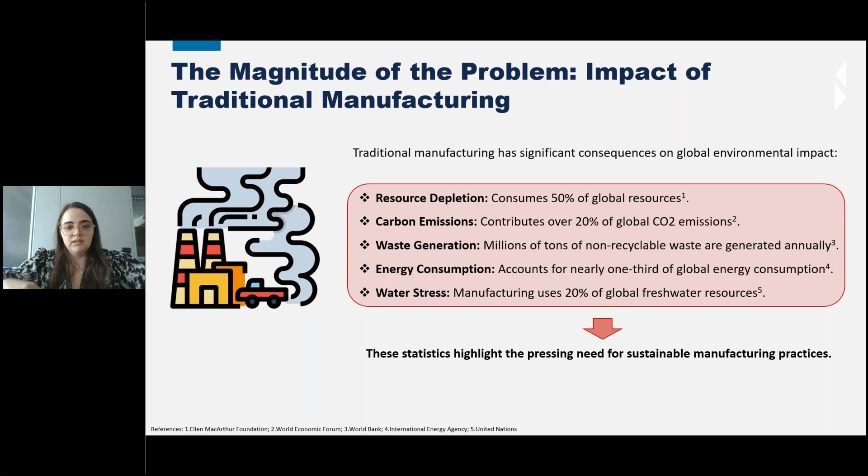The energy consumption related to traditional manufacturing processes is equal to nearly one third of global energy consumption. It's also responsible for more than 20% of global freshwater resource use. Seeing these numbers, you can see why it's so important to take action on this topic.

But what do we mean when we say sustainable manufacturing? When we say sustainable manufacturing, we refer to all the practices needed to design, source, and deliver a product with the maximum amount of value, while keeping the minimum environmental impact.

Sustainable practices should address climate change mitigation by reducing greenhouse gas emissions and energy consumption, but also minimizing material waste and optimizing resource use in processes. It's important to address responsible consumption, giving consumers eco-friendly products, and to be compliant with all the laws and standards related to the environment.

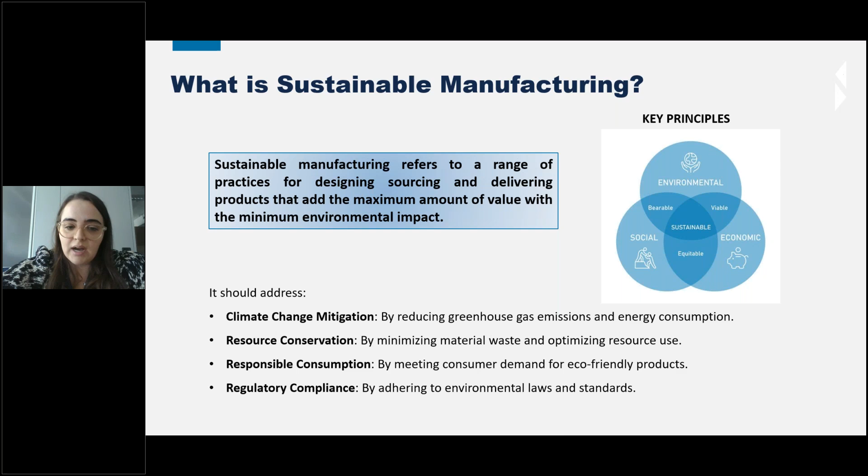But it's very important to focus also on the other aspects of sustainability. In order for a process or product to be sustainable, it needs not only to be sustainable from an environmental point of view, but also economically viable and socially acceptable.

But I think the main topic is how companies can benefit from the use of sustainable practices. The first benefit a company can have is, of course, cost saving, derived from reduced energy consumption, reduced resource use, but also minimization of the waste that needs to be disposed of at the end of the process.

This practice will allow environmental preservation, contributing to a healthier world for everyone, but also being compliant with all environmental regulations, and will give the opportunity to respond to the increasing market demand of eco-conscious consumers who want eco-friendly products.

Using sustainability in your company will also give a positive global reputation, giving a positive image of the company. But we also have to consider that the world is changing, and sustainability is becoming no longer a choice for companies. This will allow success in the future.

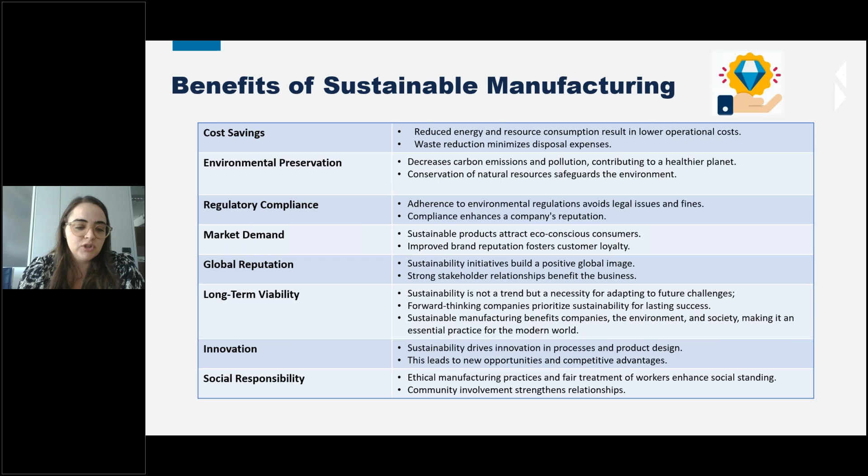So let's now go into the case studies that we want to show you today. We will present different types of projects, case studies that address different sectors in manufacturing.

As you can see, the first three projects are related to the composite sector. The first two mainly in the automotive sector, the third one more in the wind power sector. The fourth project is related also to wind offshore facilities, but more in the development of material solutions. The fifth project is more a horizontal theme that can be applied to different sectors, focusing on human-centered rapid reconfiguration of production and value chain. The last project is related to the heavy and extractive industry waste of this sector.

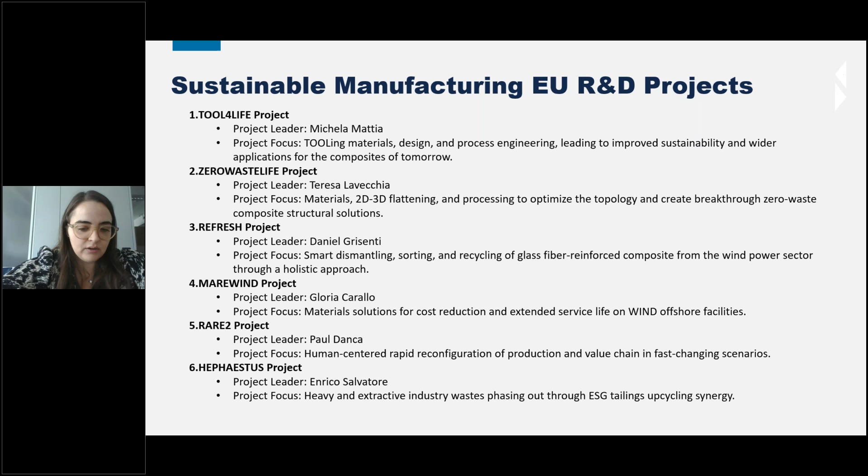So I will present the first project, which is TOOL4LIFE, and then I will give the floor to my colleagues to describe the other projects.

As I told before, TOOL4LIFE is a project related to composites, and it received funds from the European Union under the LIFE program. The title of this project is Tooling Materials, Design and Process Engineering, leading to improved sustainability and wider applications for the composites of tomorrow.

When we talk about composites, we can talk about different sectors and applications. Due to their properties, they can be applied to different end uses, for example automotive, aeronautics, space, nautical sector. This is because they are very light material, but allow very high mechanical performance.

But what is the problem of composites? Especially the sustainability of these products. Usually they cannot be recycled due to the use of thermosetting materials for their production.

What do we want to achieve with TOOL4LIFE? TOOL4LIFE wants to address the issue of sustainability in a pre-processing step, the application of tooling as mold for composite manufacturing. If we consider nowadays, more than 95% of tooling is made with thermosetting materials such as polyurethanes, and it corresponds to more than 2,000 tons per year of material that is landfilled, just in Italy.

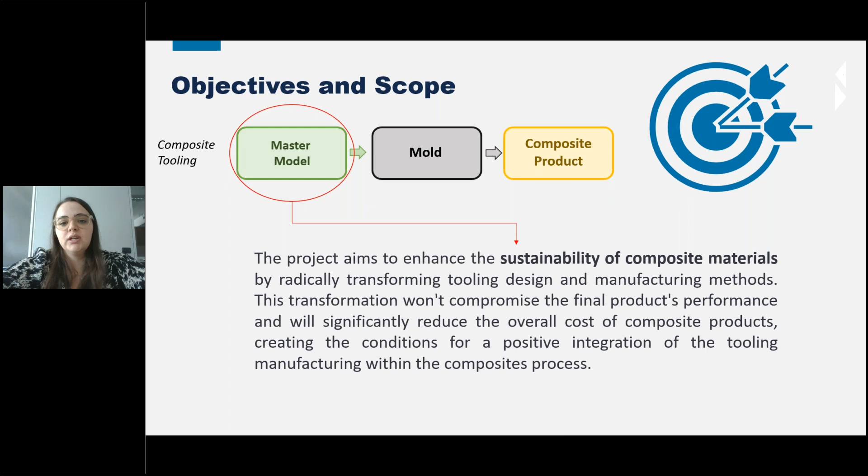When we want to produce a composite product, before having the final product, we need to first produce a master model. This master model will be used to produce a mold that is finally used to produce the final product. With TOOL4LIFE, we want to work on this first step, the production of the master model. We want to transform the tooling design and the manufacturing method of the master model in order to not modify the final performance of the composite product, but reducing the overall cost, reducing the impact of the process, while having a process that is easily incorporated into the traditional production of the composite product.

The objective that we want to achieve with TOOL4LIFE is to develop, adapt, and demonstrate a hybrid technology made of additive manufacturing plus milling for the production of the tooling that will be used for the final product. We foresee to reduce up to 80% the volume of material used in the process, to cut energy consumption by 33%, and to reach a target of 9.2% CO2 equivalent emission reduction compared to the traditional process.

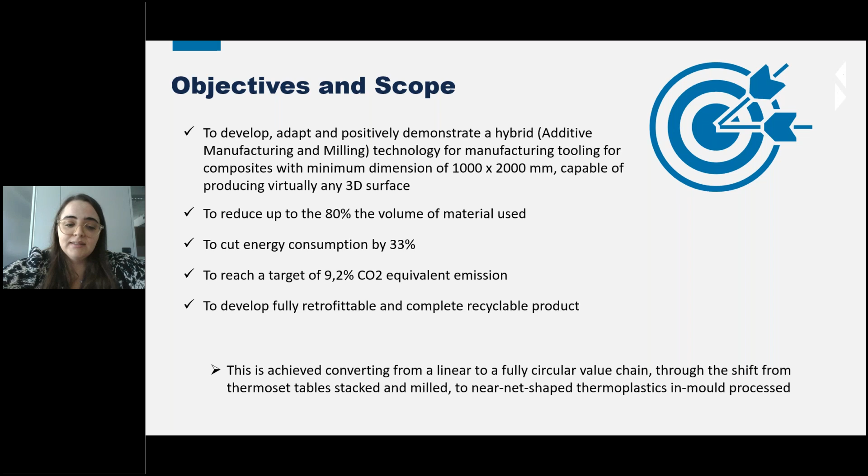We want to develop a new process that is fully retrofittable, and the final product, the tooling that we will have, will be completely recyclable for producing a new process, a new product, new tooling. This will be done by going from a thermosetting material to mainly a thermoplastic material. Which are the impacts that we want to achieve with TOOL4LIFE? I want to give you some numbers of what we are expecting to achieve.

When we talk about waste production, we foresee reducing it by more than 30 tons per year by the end of the project. Considering our replication strategy, what we want to achieve in the medium term, more or less 5 years after the end of the project, is a reduction of waste production around 200 tons per year.

We will also reach energy savings thanks to the use of additive manufacturing compared to machining of the tooling, which is the process used now. This will be equal to 18 megawatt-hours per year at the end of the project, and hopefully 120 megawatt-hours per year in the medium term.

This new process will also allow the elimination of toxic chemicals now used in the production of thermosetting materials. An example is the use of isocyanates in the production of polyurethane, the most used material now. This elimination will be around 20 tons per year at the end of the project, and in the medium to long term it will reach 130 tons per year.

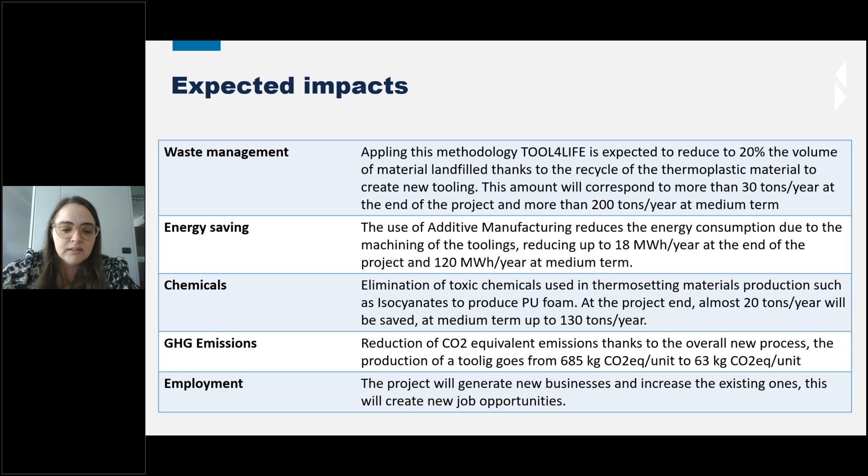TOOL4LIFE will also allow us to reduce CO2 equivalent emissions, reaching an emission of CO2 equivalent per unit of tooling equal to 63 kilograms. It will, of course, also allow us to generate new business and increase job opportunities in the sector.

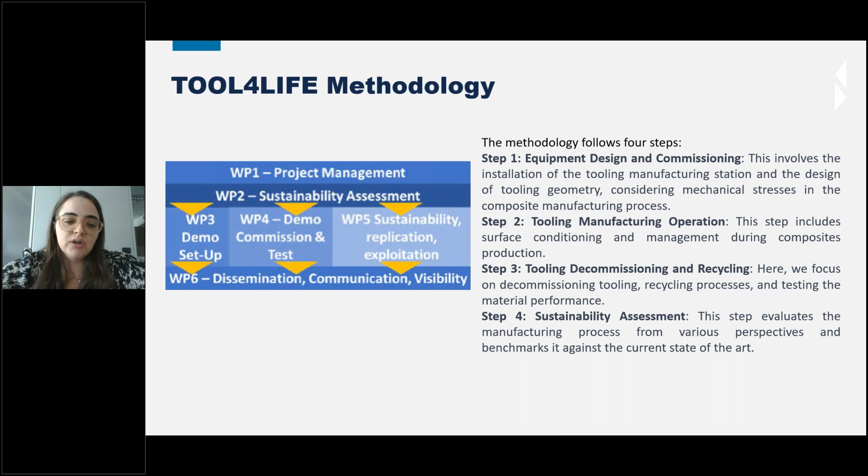At the end of life, the tooling will be recycled, and we will also test production of new tooling using that material. The fourth step will be the sustainability assessment. The results and the process we reach will be almost ready at a commercial TRL.

When we talk about the replication strategy after the end of the project, we are planning to use this process to completely substitute the production in Bercella, but also to achieve production of tooling as a service for other companies using this process. In the long term, we would like to spread this new, more sustainable technology to make other producers similar to Bercella use it, licensing the technology of course.

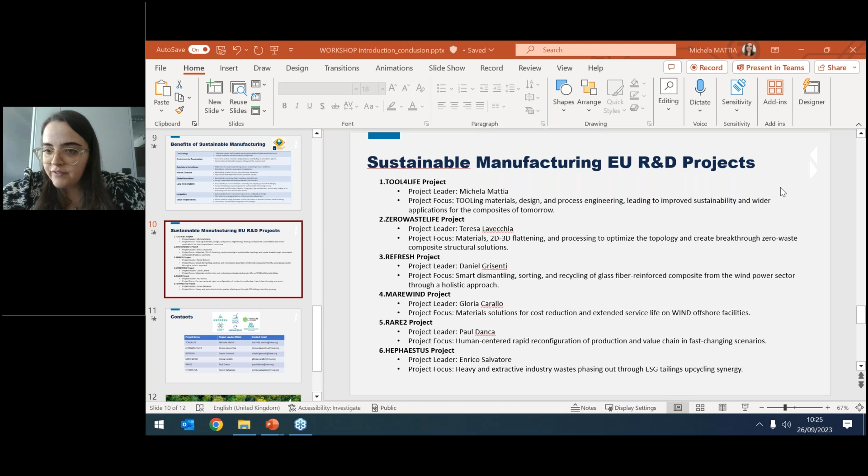I will proceed with a project that is quite the prosecution of Michela's project, and in fact the coordinator of the project is the same, the Bercella company. The project Zero Waste Life has been funded under the Life Program 2022, and started on July 1st, 2023. The objective of the project, differently from Michela's case where tools for preparing pieces were made, is preparing the pieces through an optimized process that improves the global sustainability of composite production.

Going into the depth of the project, as Michela said before, we know the main issues on composite materials, which essentially rely on the difficulty to recycle composite. Generally they are treated by pyrolysis, so incinerated, creating CO2 and chemical emissions, or they are wasted, landfilled, and treated by chemical routes.

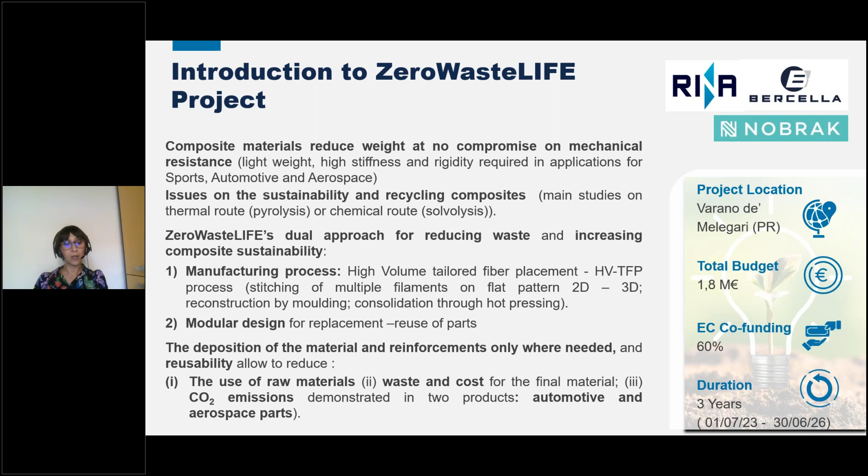To give a more in-depth view of the project, as Michela showed before, the first step in this case will be the consolidation of the design shapes, essentially to optimize with theoretical calculation the shape of the pieces to produce, with the idea to bring waste ideally to zero. Then a design of the basic elements will follow, essentially made of beams, plates and shells that can be combined to create future complex products.

A further step will be the demonstration of this product in a real case study, particularly producing pieces for automotive and aerospace applications. Finally, at the end of the project, there is an exploitation and IPR strategy management, to create awareness around the initiative and increase industrial attractiveness towards this new patented technology brought by Nobrak's partner.

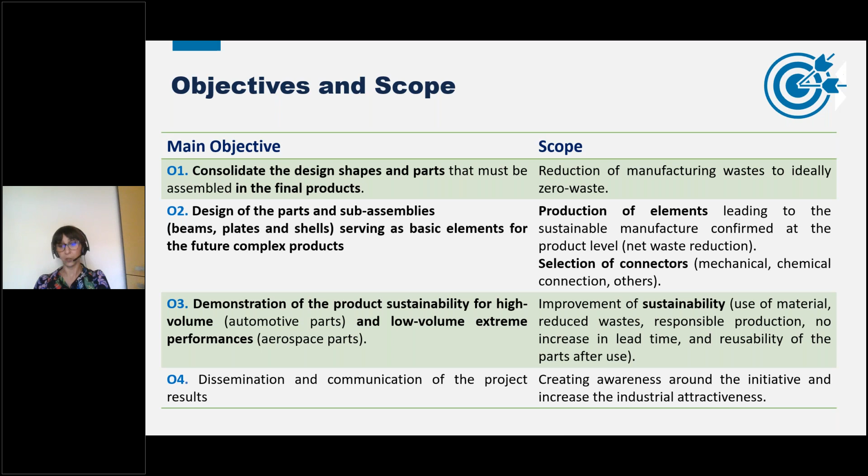In terms of expected impact, as you probably know, the LIFE program addresses several environmental topics, and Zero Waste Life belongs to the circular economy and quality of life sub-program. This program aims at facilitating the transition towards a circular economy, a sustainable economy, and a toxic-free environment.

The Zero Waste Life process addresses several objectives in relation to the sub-program, because what is expected from the project is the reduction of landfill material, since the process requires thermoplastic materials instead of thermosetting material, as Michela said before. That also means reducing non-renewable materials, because thermosetting resins are not recyclable at all, while thermoplastic materials can be reused again and again.

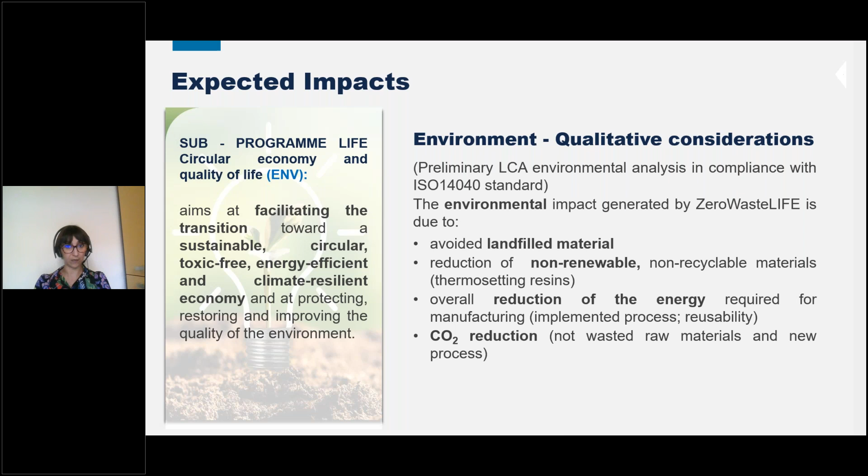We also attempt to give a raw estimation of the quantitative impact of the project, and this estimation, also relying on the numbers of the previous TOOL4LIFE project, has been fixed around the values you can see in these slides.

We expect to save more or less 40% of raw material from landfilling, which is more or less 10 tons per year for Bercella's company, because this is the amount that the company brings to landfilling every year.

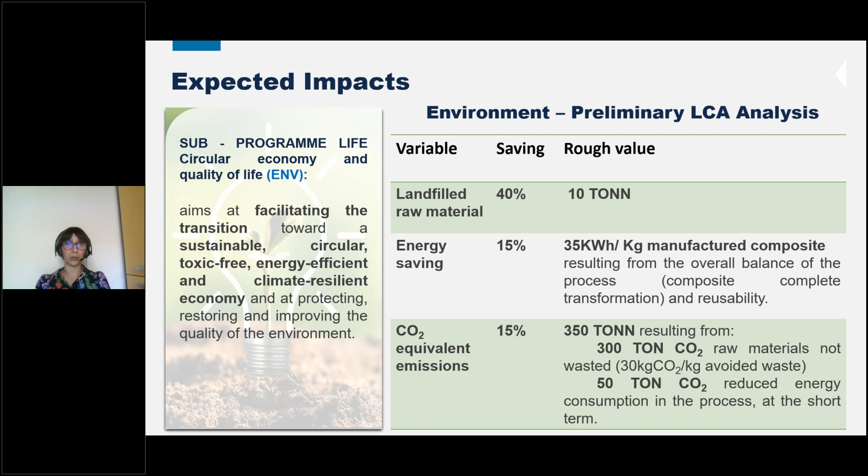We expect an energy saving of 15% that results from the overall balance of the process, and from the possibility of reusing some parts due to the modularity of the pieces. We also expect a reduction of CO2 equivalent emissions of 15%, again due to avoided waste of raw materials, and to the global balance of the process.

We made also some qualitative and economic considerations. As you can understand, avoiding landfilling materials brings with it two types of cost reductions: first, a reduction of the cost of material, and second, a reduction related to the additional taxes generally associated with landfilling material.

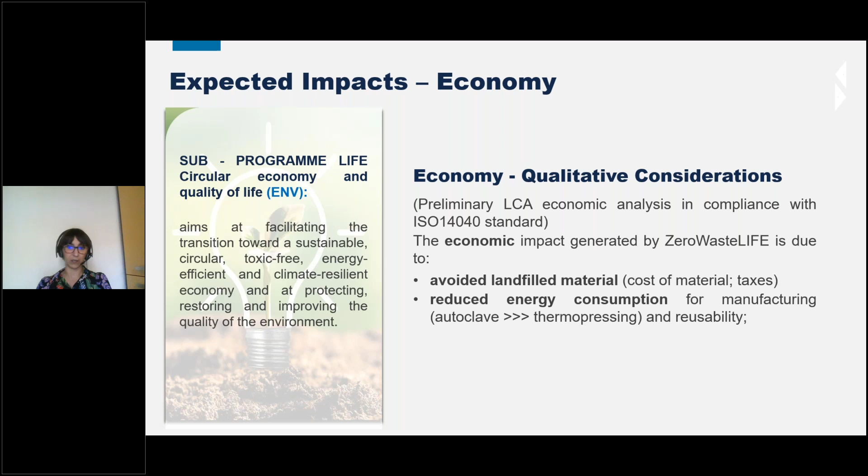Other cost reductions will be due essentially to reduced energy consumption during manufacturing and the reusability of the pieces. We attempted to make a quantitative estimation of the savings in terms of reduced materials and energy, meaning an estimation of production cost. The preliminary LCA analysis shows us that this value can vary from 10 to 40%.

This is a huge interval, essentially due to the type of composite produced during the manufacturing process. Anyhow, we expect as a minimum to reduce the total production cost by 10%.

300,000 euros are the cost savings expected from the raw material that is not discarded at the beginning of the process, and 5,000 euros is expected as a saving in terms of taxes that would otherwise be spent on disposal of the raw material.

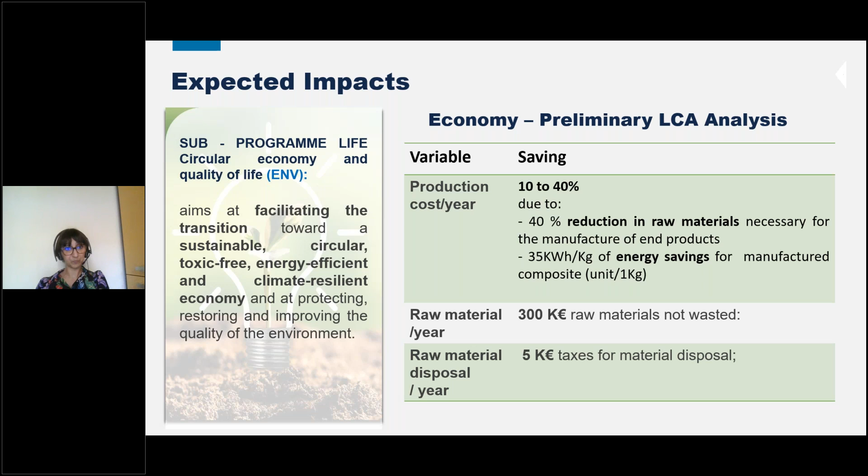We also made some provisions about the impact on society of the project. Obviously, in the short term, what we expect is an improvement of worker conditions in the facilities that implement the process, that is Bercella, and also other clients where the process will eventually be implemented, plus an improvement in the quality of life for citizens thanks to reduced CO2 emissions and reduced landfill and waste materials.

In the long term, the provision is the possibility to increase workplaces and opportunities for training, due essentially to the adoption of a new technology: stitching the filaments in the place where they are essentially required.

Also, Zero Waste Life, like the previous project, is compliant with some objectives of the European Green Deal, particularly the concept of mobilizing industry for a clean and circular economy, obtained by reducing energy consumption and CO2 emissions, and also by reducing waste and recycling produced material once it is dismantled.

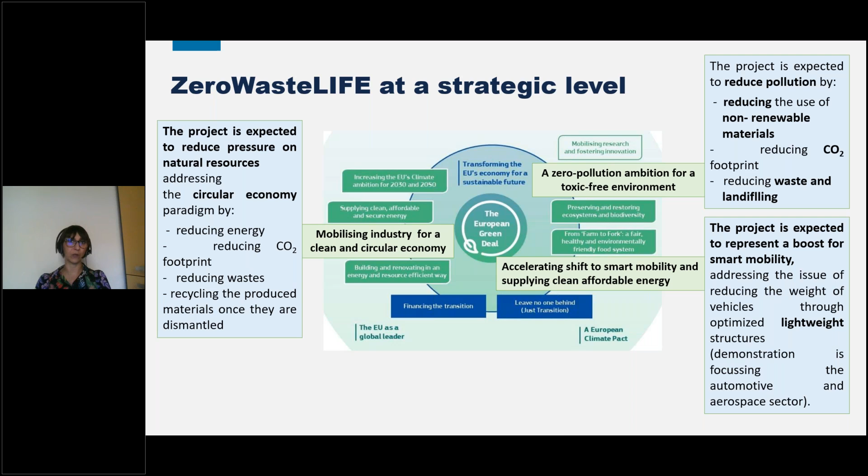Essentially, the idea is that reducing the weight of materials and producing composite materials known for their lightweight and stiffness, with no compromise on mechanical properties, will allow the automotive sector and also, for example, the aerospace sector to produce lightweight structures. This goes towards sustainable mobility, eventually reducing the cost of moving the cars, and as a consequence the produced CO2 and so on.

As with the previous project, this project is organized in 3 main steps: the definition of theoretical parameters and optimization of the design of the pieces and the process; the development of the technologies through demonstration in two real case studies; and finally an economic, environmental, and societal assessment to validate the sustainability of the project.

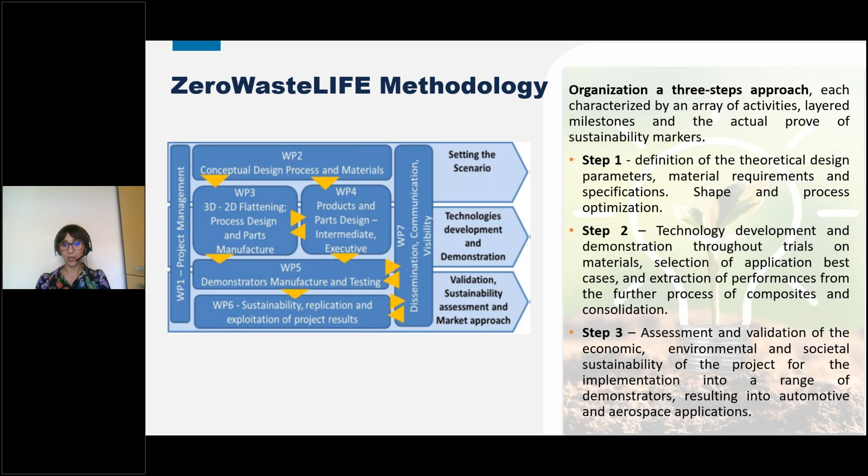in the case of automotive and aerospace application.

So what we expect after the end of the project: our idea is that we can design 3 different levels of exploitation.

The first level is the internal exploitation of the new process by the company, by Bercella. That means reducing the cost of production and creating savings for the company itself. Eventually, the idea with the dissemination and communication plan will be to reach out in the first years of the project to new clients to produce limited series of the new composite.

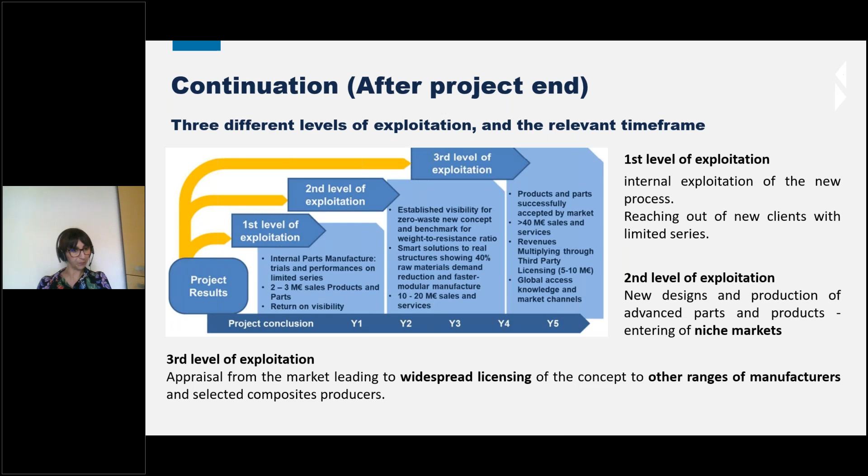Okay, that's all, and I want to thank you for your attention.

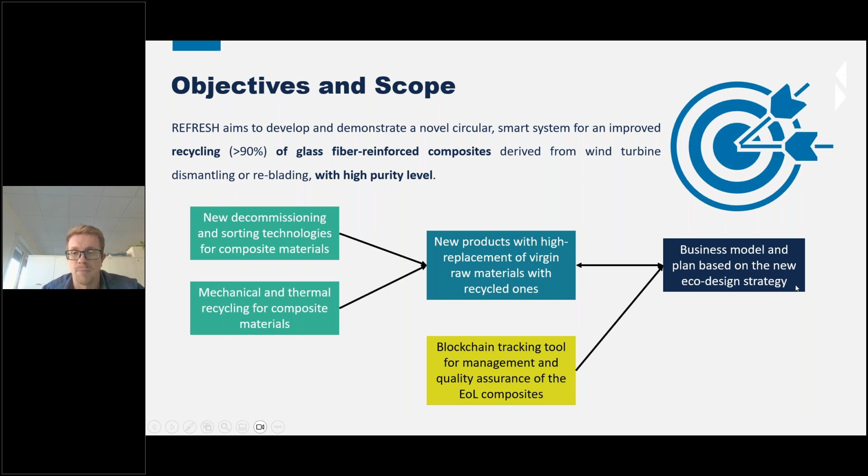Alongside this, there will be the development of a blockchain tracking tool, which aims to manage the data of the recycled components and assure the quality for the end-of-life composites. These objectives will also lead to the development of a business plan for the eco-design of the whole project solution.

This is the concept through which we aim to reach the above objectives. So the whole Refresh concept is to start from the decommissioning of the wind blades and end with the end product ready for the market.

So at the decommissioning of wind blades, the blockchain tool intervenes, getting the information, technical information, composition information of the dismissed blade. Then the tool makes a market check to check the current market demand of end products.

Once it made the market check, the technical check, environmental check, it selects the proper recycling process that is more suitable at the moment for that blade, for that specific blade. So this is the business, which is flexible because it can constantly adapt to the current market of the sector. After the selection, based on the market demand and technical condition of the blade, there are the different recycling processes.

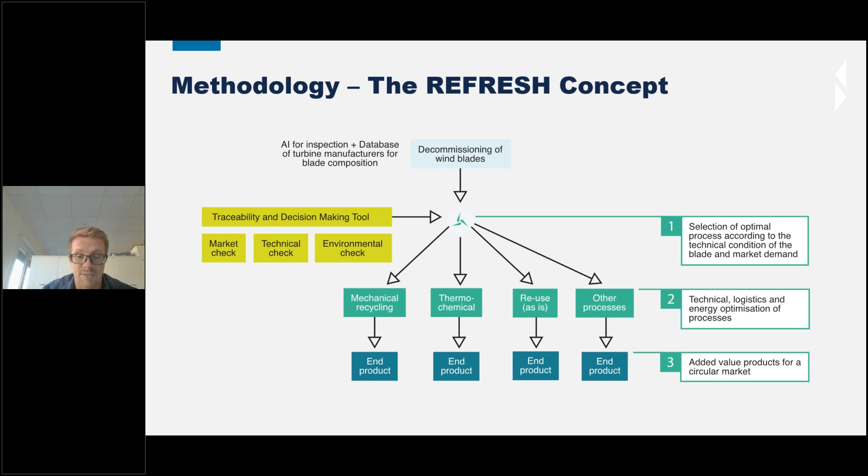And at the end we have a refined end product ready for the market, because this was the real challenge for the project concept. The material that composes wind blades is not so precious, we can say. The fact is that virgin raw material is cheaper because it doesn't need any process to be recovered, so no energy waste, and it usually has greater mechanical properties. So the need was to get an end product with an added value, because that added value makes the solution competitive. So this is the concept: through the various recycling processes, we get an end product with higher replacement of virgin raw material, but we gain in the added value of the project for the circular market.

So, the expected impacts - here there is some data based on the penetration rate expected from the project end. As said before, the main impact is the reduced use of virgin raw materials in terms of composite materials. So we have a lot of tons of product that could be replaced with our recycled materials. These data are based on a forecast assuming, in the first 5 years from the project end, a penetration rate of the project in the market of 5%, and 12% by the next 8 years from the project end.

Then we have an increased amount of recycled composite materials from the wind power sector, which for glass fiber reinforced composite materials amounts to 22 megatons in 5 years from project end, and 53 megatons in 8 years from project end. And lastly, but not least, this will result also in new job opportunities in the waste management sector, the eco-design sector, also the digital sector, because we have the digital part related to the blockchain tracking tool, and the manufacturing sector.

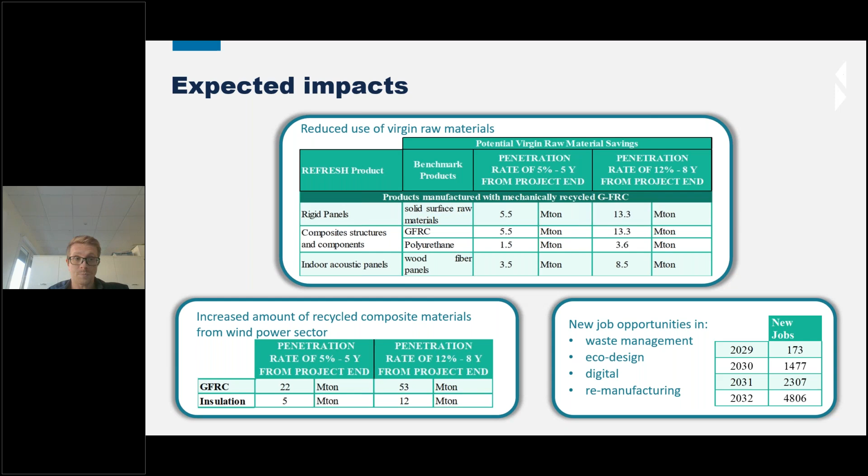So, lastly, the exploitation perspective after the project end. We have different solutions developed by different partners. As I said before, we start from the decommissioning, so we aim to develop a portable system for the dismantling and shredding of wind blades, because wind blades are logistically difficult to transport after dismission. So we plan to have a portable system that can pre-treat the blades and make them more transportable for the recycling processes.

Then we have the mechanical recycling, with a technology and formulation for secondary raw materials recycling. For the thermal processes, as said before, we generally have pyrolysis systems, but one is assisted by microwave, and the other one with electrical pyrolysis. In this case, we can also obtain chemicals from the resin part of the composite material of the wind blade.

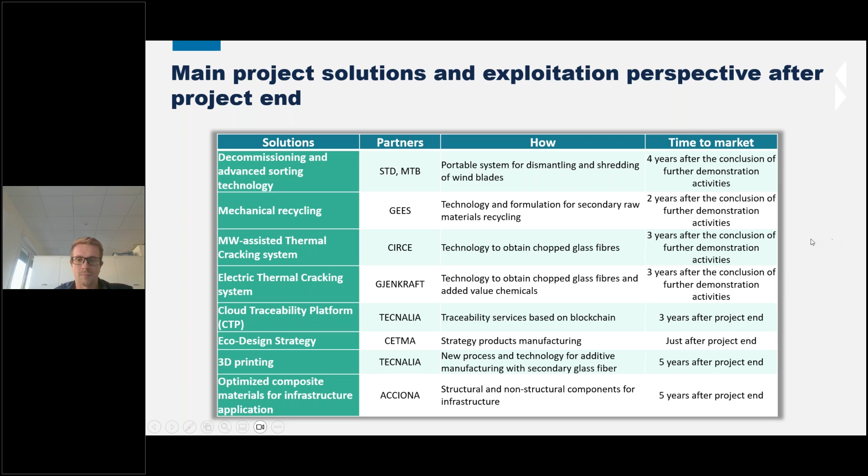So thank you for the attention. Sorry for my voice.

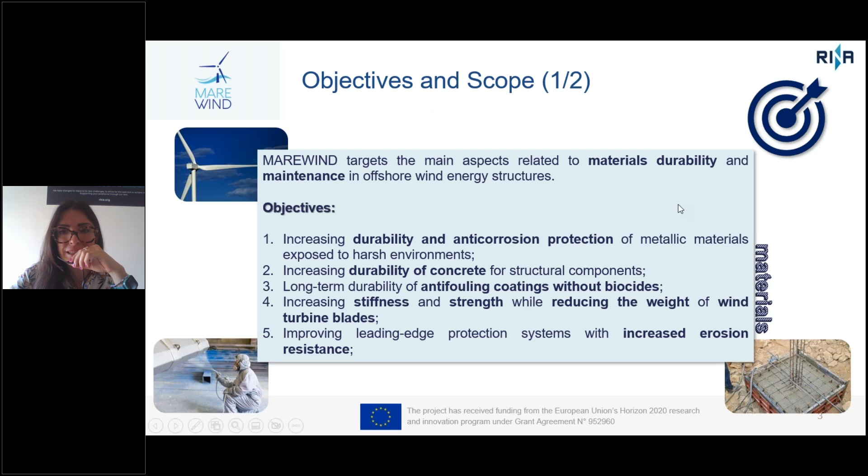In addition to materials, we also have processes that are improved during the project, for instance the development of structural health monitoring techniques for offshore wind turbines. Then some predictive models have been developed during the project for the corrosion protection.

Recyclable by design is one of the approaches developed during the project for the wind turbine, as well as a recycling procedure. Then all the technologies developed during the project should be scalable at the end, and also an application of existing standards for this kind of new materials has been targeted during the project.

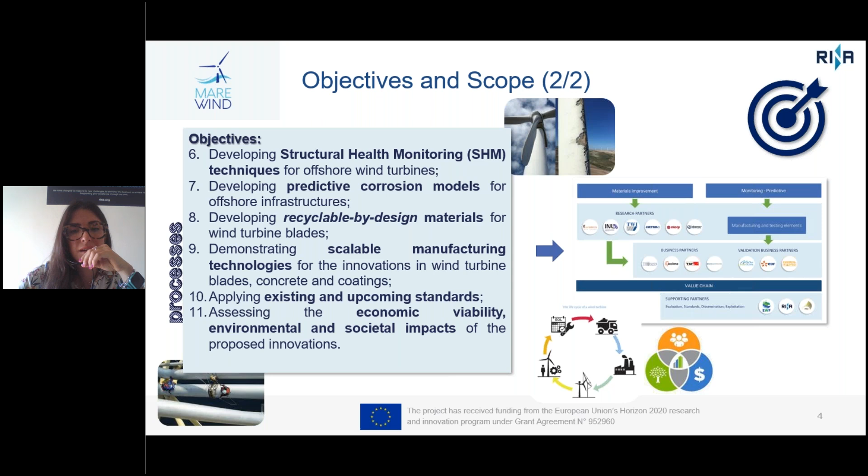Finally, but not the least, the economical, environmental and societal viability of all these proposed solutions is assessed along the project duration. Then, among the expected impacts of MareWind project, we will have, of course, the increase of the durability of new materials developed during MareWind.

So both composite materials for the wind turbine, as well as the anti-corrosion coating, the structural reinforced concrete, anti-fouling coatings, and anti-erosion coating target an increase in their durability with respect to the standard baseline that is available at this moment.

Not only from the material perspective, but also from the cost point of view. And then in order to reduce also the maintenance of this structure along the years, another expected impact is to reduce the life cycle cost of the structure during its lifetime.

Then also the cost reduction of offshore energy production, so this is an indirect effect but also accounted for in the project, and the reduction of environmental impact. At the same time, also reducing CO2 emissions and fuel dependency is one of the expected impacts.

Another indirect but important spin-off of the project is also to create growth and jobs in Europe regarding the marine and wind energy environment.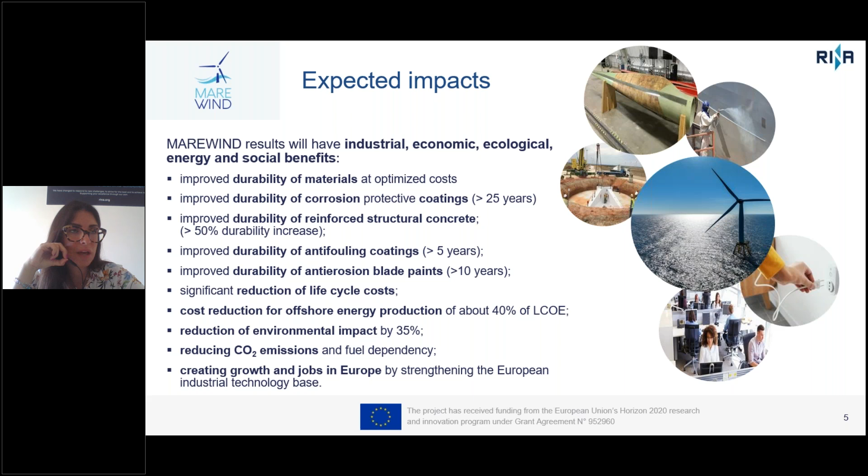At the strategic level, MareWind takes cue from European wind energy sector trends. As we know, the Renewable Energy Directive aims to increase the share of renewable energy by at least 20% in the next years, as well as the study of the European Commission set an increase in the production of wind energy to 550 gigawatts by 2050, as targeted by the European Green Deal program.

Another important study from WindEurope, which is an association related to wind power, set an increase of 7 gigawatts of wind energy until 2030, and so a constant increase year by year of the production of wind energy. Of course, some challenges are related to offshore wind energy nowadays.

First of all, the use of materials that don't suffer damage during their service life because of radiation, wetness, and abrasion is one of the most important targets, which also has relevance and importance in reducing the operation and maintenance costs related to this production.

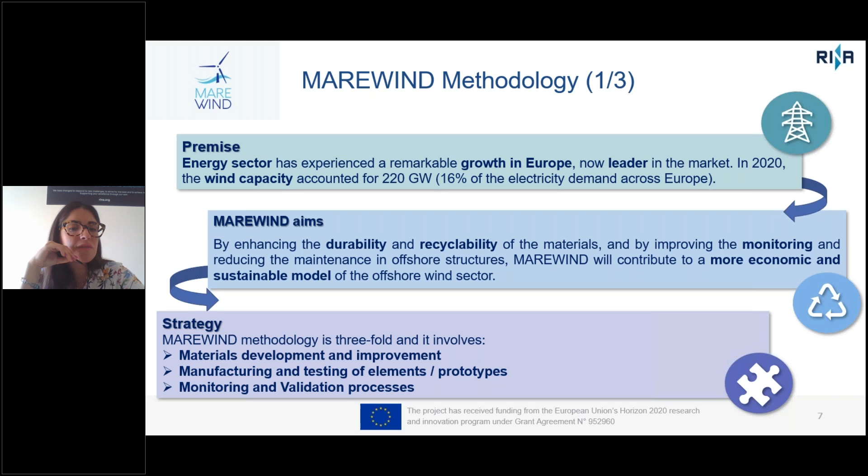From the materials point of view, we have the production of new composite wind blades. The introduction of silica nanoparticles improves durability in marine environments.

Another important topic is the recyclability of composite materials. CETMA proposed a new methodology to recycle GFRP structures at the end of their service life. Not only recyclability, but also an efficient production process: EIRE, the blade manufacturer, set up an advanced tooling process that allows for cost-effective and sustainable production, without the use or emission of VOCs.

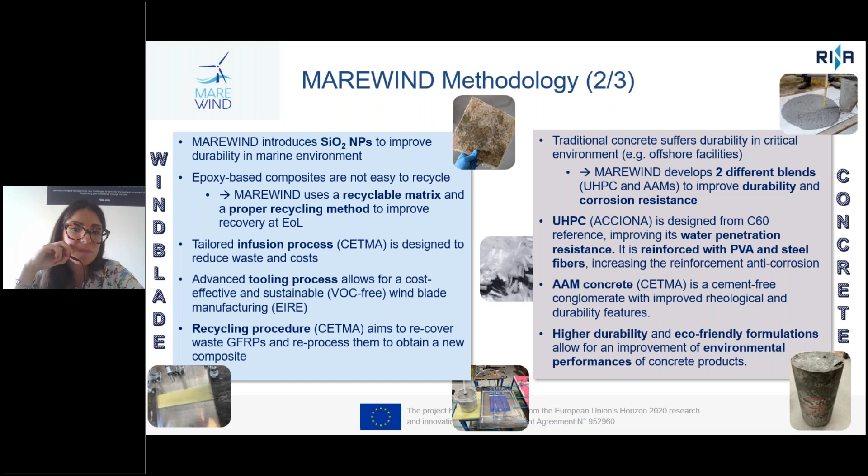Another material developed during the MareWind project is concrete. Two different formulations were developed. The first, from Acciona, is an ultra high performance concrete designed to have increased resistance to water penetration. The other, proposed by CETMA, is an alkali-activated material concrete with a cement-free formulation. Both systems have higher durability and an eco-friendly formulation to meet sustainability requirements.

In conclusion, for the materials perspective, we have three different kinds of coating. The first, developed by Lurederra, is an anti-corrosion coating with low or no chrome addition, a sustainable formulation. The second, also by Lurederra, is an anti-fouling coating without the use of biocides, and its room curing temperature allows for low energy consumption. Finally, an anti-erosion superhydrophobic coating developed by TWI is a polyurethane-based coating without the addition of metals, with a very high contact angle, giving increased rain erosion resistance.

After the materials formulation, we also have the development of prototypes and testing in relevant environments, which allows for the identification of criticalities or other specific features that have to be corrected and improved along the project.

Besides testing in relevant environments, finite element method models developed by Rina and Inegi help predict mechanical properties before that testing, an important tool for understanding the behavior of these materials. In addition, the multi-scale model MODA helps understand material characteristics along their testing over time.

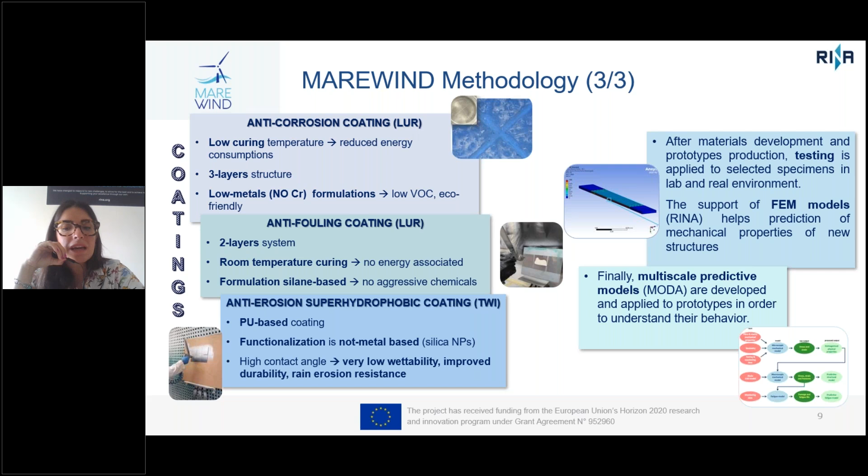After the project ends, the objectives of MareWind are to increase the penetration of these recyclable materials in the wind energy market, to meet European climate targets and create new job opportunities in the wind industry, to improve sustainability in materials and processes for the offshore wind sector, to upscale production and diffusion of these new products in the marine sector and other correlated sectors, and to promote the methodologies developed, such as structural health monitoring and predictive modeling, for the marine and wind sector.

We also aim to increase awareness and interest in new technologies for a sustainable world, through conferences and other dissemination activities performed and to be performed at the end of the project, and to promote basic research all around Europe towards new sustainable materials and processes for the wind offshore sector.

MareWind is a social project, so here you can find the contacts of the project coordinators, Mrs. Marta Mateo and Mrs. Cristina Salazar from Lurederra. We have a website with additional information about the project activities, and also social media channels on LinkedIn, Twitter and YouTube, where it's possible to subscribe for updates and the newsletter.

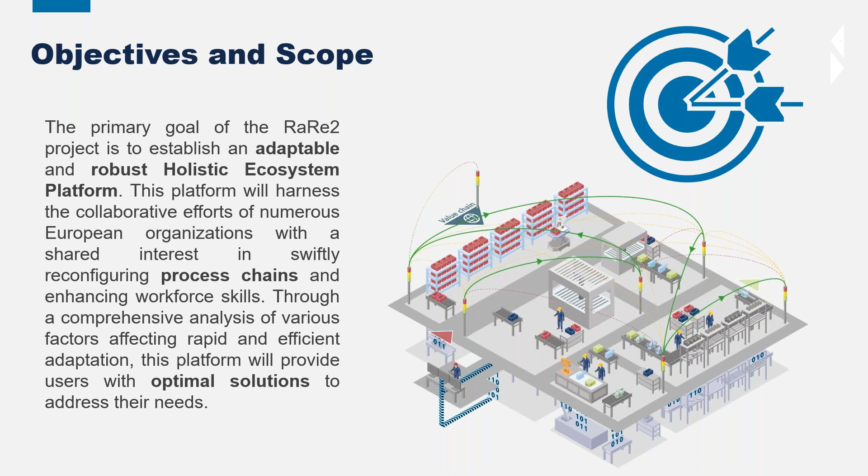And to give as output optimal solutions for, as we said, the reconfiguration in case of disruptive changes, but also for general optimization for those companies that already have an operating process.

In general, the project will focus on 5 main themes, which are the platform itself, which will be the kernel of the project. We'll deal with early detection, because this platform does not only want to help in the reconfiguration in case of

disruptive changes, but also to try to predict them with the use of, for example, AI technologies to give better results in case these disruptive changes happen.

It will focus on digital twins, because to give these suggestions on reprocessing, on reconfiguration, it will need to understand how these processes work, and this will be done with the implementation of digital twins.

It will deal with workers, and in particular with their skills, because it would be useless to give proposed solutions if there is not the base workforce able to implement these suggestions.

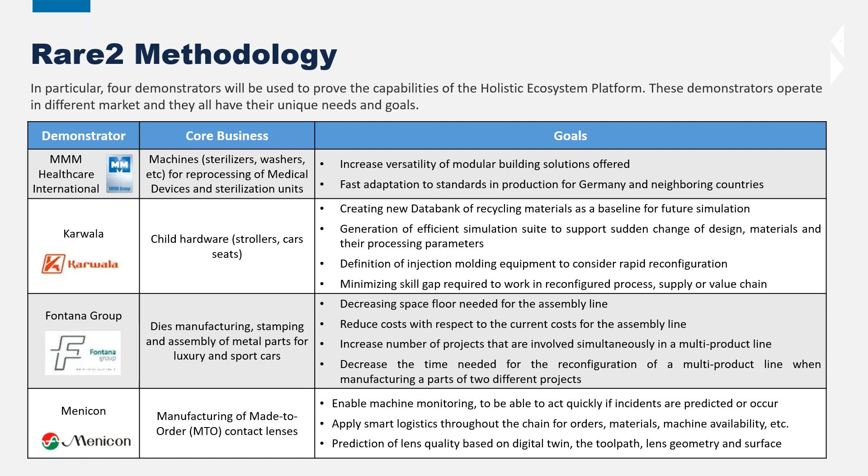And all these goals these different demonstrators have are just to give an idea of what we expect this holistic platform will be able to do.

In particular, at the end of the project, we expect to have improved a wide range of production steps that will also consider logistics, non-manufacturing operations, and other factors that can facilitate the production run. We expect to decrease the time required for reconfiguration activities and the reconfiguration of individual production steps that can improve the overall performance of the production line.

We expect to have understood and established some protocols for optimal practice in rapid reconfiguration, which we would like to be usable and transferable in many sectors. And also we would like to create verified standardized interfaces and protocols in order to empower digital and flexible manufacturing processes.

And all of that, for the nature of the project itself, we think would be best achieved with international cooperation, in particular with realities outside the European zone, like Japan, South Korea, and Canada, because recent events have proved how the world is more interconnected than everyone was expecting.

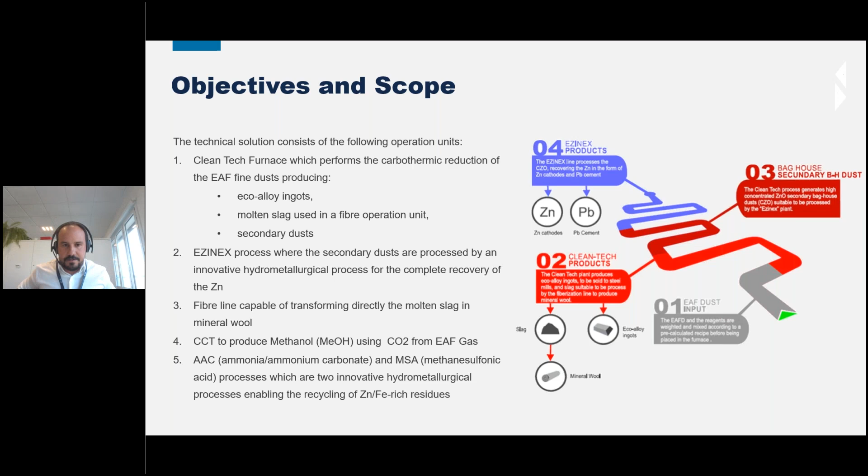The key objective of the project is to develop a set of scalable and tunable operation units to be built as an integrated process plant able to treat multiple process wastes deriving from two main streams of metallurgical waste. The first is waste deriving from the steel industry, in particular dust coming from electric arc furnace and argon oxygen decarburization processes. These wastes represent a large volume that has to be taken care of.

This represents a huge amount of dust per year to be disposed of, with a cost of 200 euros per ton of dust to be disposed. The other stream of waste comes from the mining and extractive industry, which is unavoidable due to the processing of cutting and crushing.

The target scale application is around 10,000 tons of waste dust per year to cope with the typically fragmented European process size. Globally, the project aims to reduce energy consumption by 0.8 megawatt-hours and carbon dioxide emissions by 3 tons against current practice.

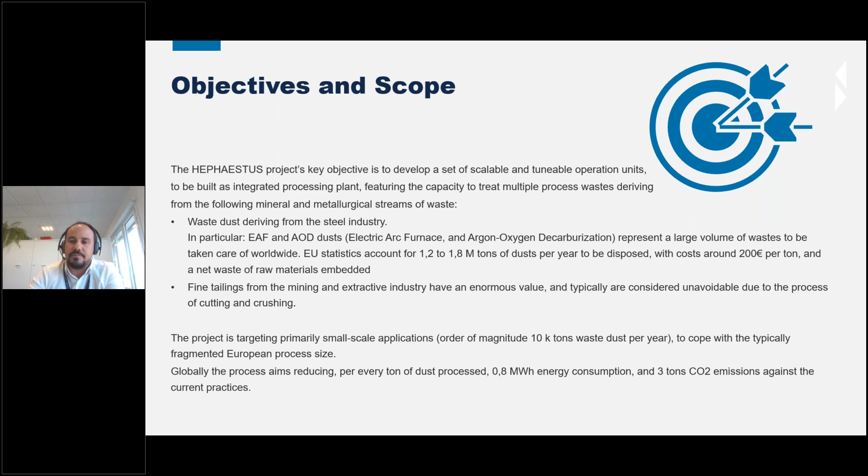The project will be verified against four macro technical objectives. The first is assessment of potential sites for project implementation. The second is the setup of a virtual plant layout to perform technological, economic, and environmental feasibility analysis. The third is construction of the pilot site and verification of the solution at TRL 7. The fourth objective is to demonstrate the industrial suitability and global sustainability of the two applications.

The Hephaestus project is expected to significantly impact the whole iron producing facilities, focusing on increasing the profitability of secondary steel smelting, increasing the utilization factor of the electric arc furnace, and minimizing the impact of waste.

The results are also assessed with measurable indicators, such as waste reduction, with approximately only 58 kilograms of inert waste derived for each ton of fine dust processed. The emission reduction is approximately 300 kilograms of carbon dioxide per ton of waste material, and this number can be further increased considering the volume of carbon dioxide that can be captured and transformed into methanol.

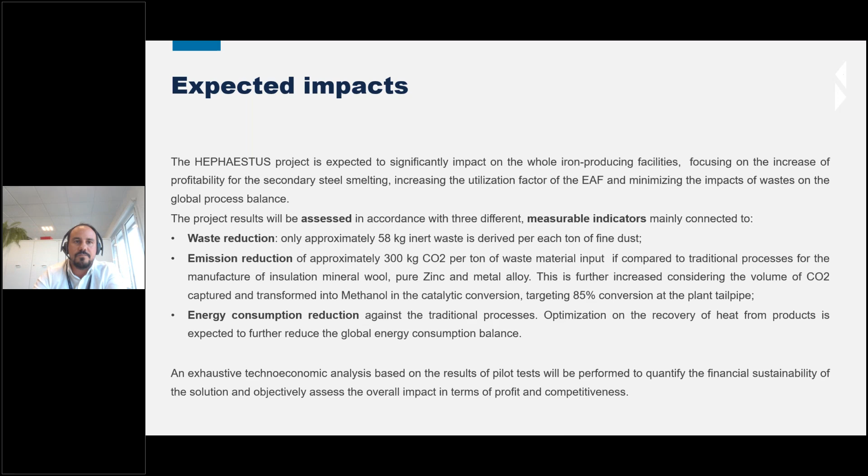The project is organized to meet the European climate and energy target for 2030, and also contributes to responding to the oncoming limitation to landfilling, to reach the objective of the European Green Deal. In particular, the following aspects represent the target and have to be considered: reduction of carbon dioxide emission, recovery of waste, and the reduction of landfilling, saving of new raw materials.

In fact, thanks to the utilization of almost the totality of the waste, 8.6 thousand tons of metal alloy can be fully recycled to the steel industry. Additionally, other non-renewable minerals that are necessary for the formulation of mineral wools can be avoided, and of course there are savings associated with the recovery of zinc.

Another parameter is the reduction of energy consumption, associated with production, the reduced production of raw materials, and also energy savings coming from the fact that the mineral wool is produced directly from the molten slag. So the two processes are coupled in order to save from remelting the slag again.

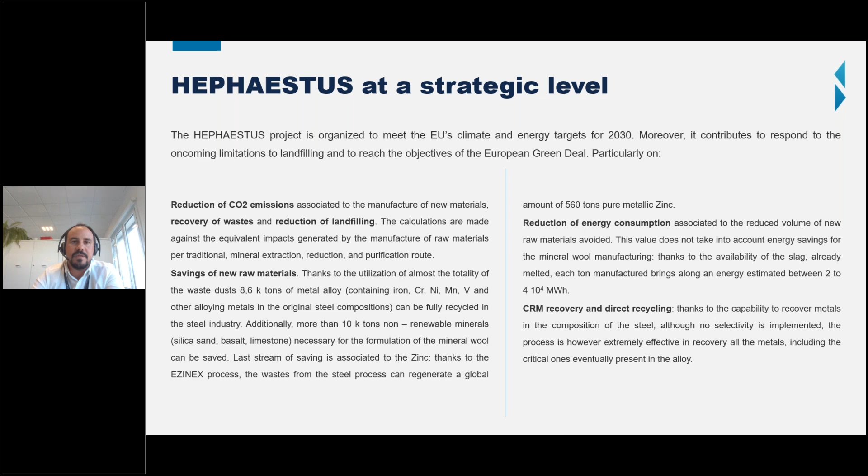The Hephaestus project is organized in 8 work packages. The first 2 concern the material and process requirements, market, the creation of the roadmap, and the assessment of waste and European sites. Work packages 3 and 4 are related to the realization of the pilots, with process modeling and design. Work package 5 is the creation and implementation of the 2 demo sites, the demonstration and validation.

There are other 3 work packages that cover the entire duration of the project: work package 6, the sustainability assessment for economic, socioeconomic, and environmental sustainability; work package 7, concerning standard dissemination, communication, and exploitation of results; and work package 8, project management.

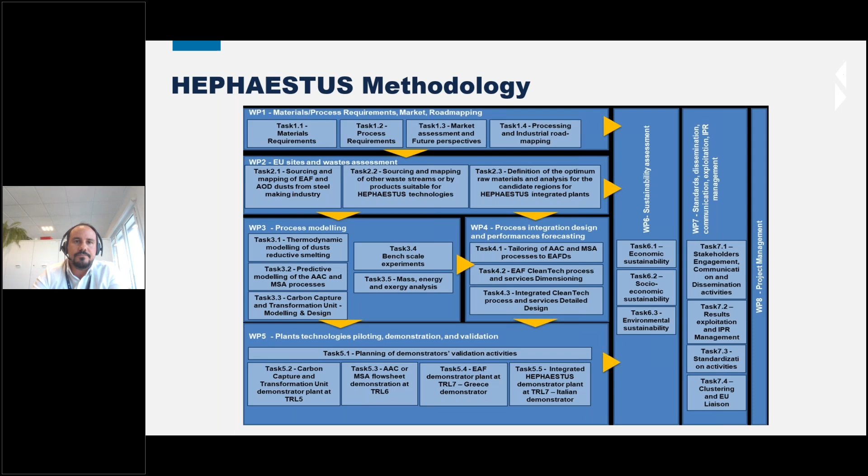Finally, we expect to reach the target and calculate the capacity to reach the target at the end of the project and after 5 years from the end of the project. We estimate that in 5 years the process should be implemented and replicated in at least 5 other steel mills. We also considered 4 exploitable results.

The first one is connected to the integrated pilot plant for the conversion of mineral, the creation of mineral wool, and the production of metal alloy and recycling of zinc. The second result that can be exploited is the process connected to carbon capture and transformation.

Then there is the hydrometallurgical process that, even though at a lower TRL, can be directly attached to the main system. And finally, there is the formulation of waste matching the circular products needs.

And that concludes the presentation. Thank you for the attention.